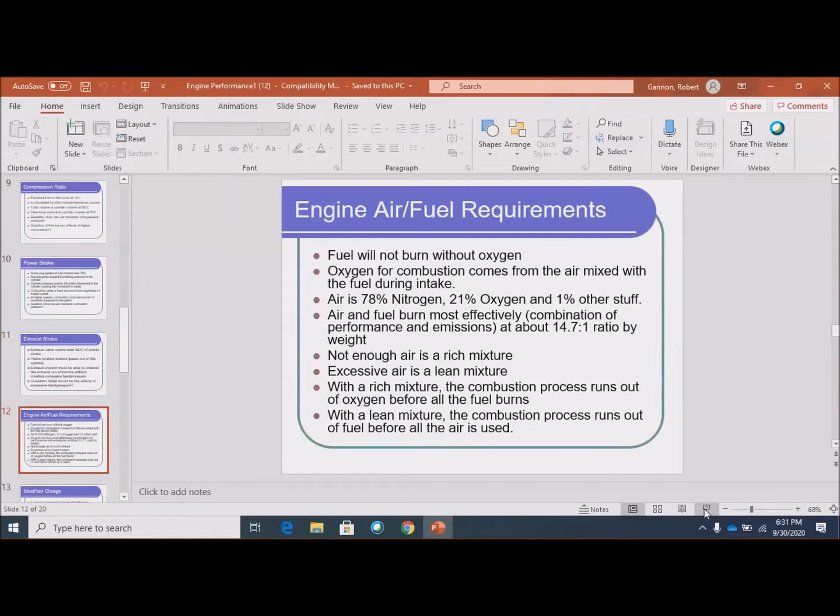And under Module 1 slides, if we open that up, and you can do this yourself or just follow along with me here. We'd gone through all 4 strokes, and we were about ready to start talking about engine air fuel requirements. So that's where we're going to pick it up now. And let me get this full screen here for you. And we'll start talking about it. So I have a bunch of bullet points here. Let me talk about each one of them.

So in the internal combustion engine, which is the gasoline engines we're talking about, or diesel, what happens is there's an air-fuel mixture put into the cylinder and then ignited. And another word for burning is oxidation. In other words, it takes the fuel and combines it with oxygen. And in doing so, a lot of heat energy is released. So we need both fuel and oxygen in order for the combustion process to happen.

Anybody that's ever covered a candle or anything like that knows that the flame goes out pretty quickly once you take away the oxygen. And if you take away the fuel, obviously, same thing happens. So you need both. Where does the oxygen come from? Comes from air that's mixed with the fuel during the intake stroke. So let's talk about that a minute.

For the first probably 80, 85 years that cars have been around, a carburetor was used. And a carburetor was a simple mechanical device that as air flowed through it, flowed through a restriction that created a little bit of a low pressure area, and then that caused fuel to be drawn in, and what controlled the quantity were little jets, little metered orifices that the fuel would flow through.

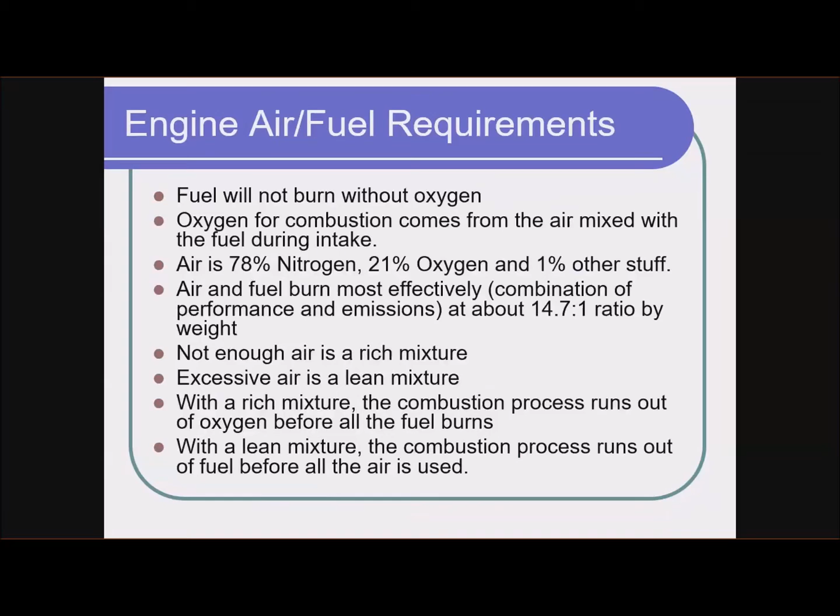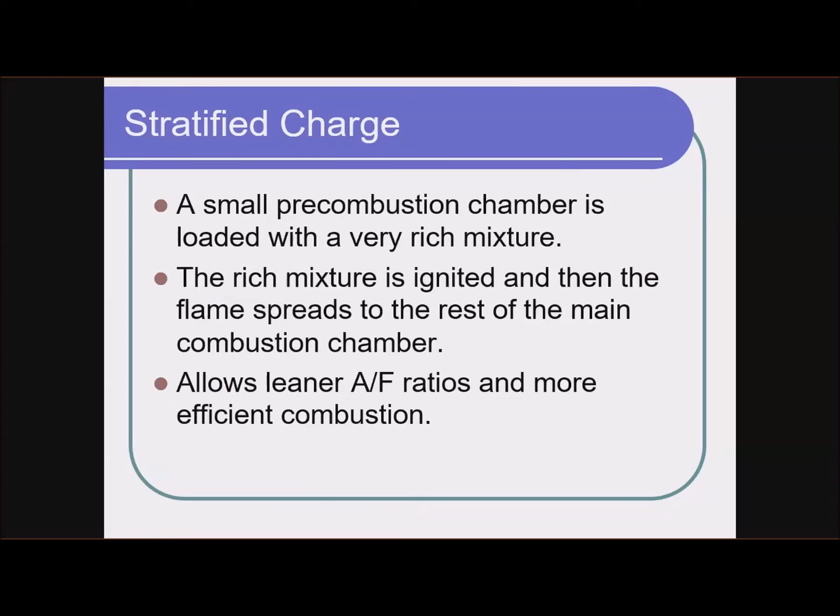This stratified charge, I think Honda had their CVCC, and there's been other engines that inject the fuel into a small area, almost like a pre-combustion chamber that gets lit, and then it spreads out into the main combustion chamber. It's a little bit weird, it allows for leaner air-fuel ratios, but still not as good as direct injection.

I gotta remember how to erase everything here. Yeah, whatever. Just like that.

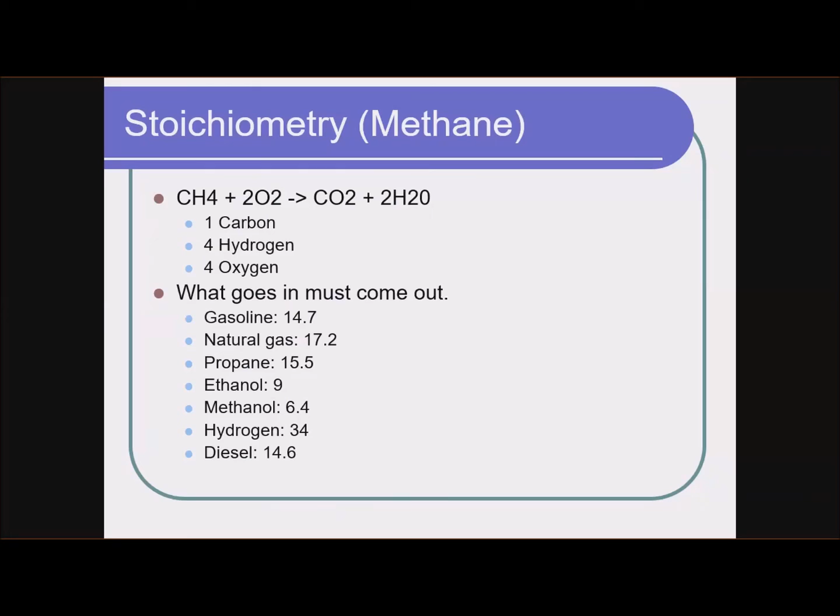So, remember I said, I don't know, a long time ago, probably a half hour ago, I lose track of time when I'm doing these, that the air-fuel requirements for an engine change depending on the operating conditions of the engine. So engines operate under different conditions: startup, idle, acceleration, wide open throttle, cruise, deceleration. And they do these things both warm and cold.

So for startup on a cold engine, it needs to be extremely rich. Now, why is this? This goes back to what I said a few slides back: only fuel vapor burns, liquid fuel does not. And on a cold engine, when you inject fuel in, a lot of it doesn't vaporize. On a warm engine, a lot more of it vaporizes than on a cold engine. So kind of across the board, a cold engine, you need to throw more fuel at it for it to run right. This is why gasoline engines have chokes.

If you deal with a lawnmower or a weed whacker, chainsaw, something like that, a snowblower, there may be a choke on it that you need to use in order for it to run well when you first start it, especially on a cold day, and then as things warm up, you can take that choke off. And what the choke does is it blocks off the airflow and creates a lot of suction that pulls fuel in through the carburetor.

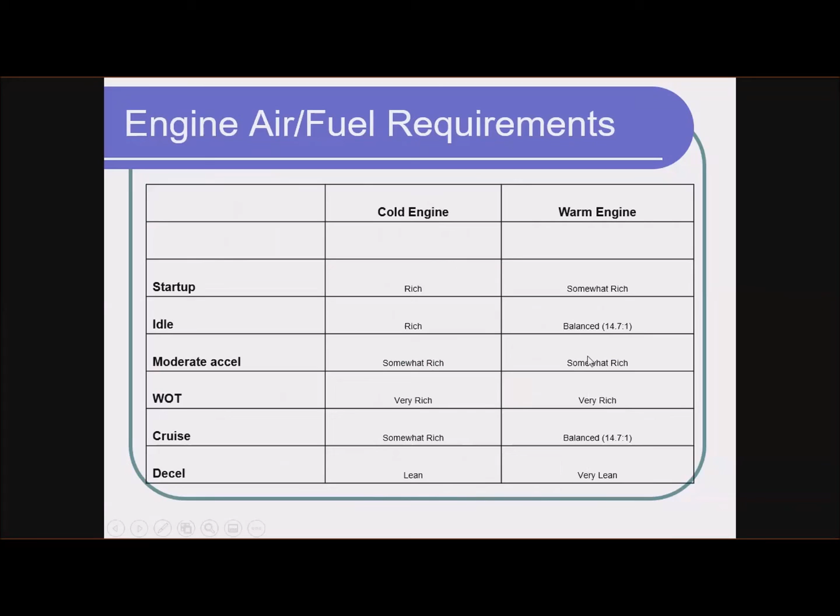So what does that mean? That means that 14.7 to 1 is not the best mixture for fuel economy, right? We get better fuel economy with a leaner mixture. It's not the best air fuel mixture for power. We get more power with a richer mixture. So what is it really? What is that air fuel mixture of 14.7 to 1?

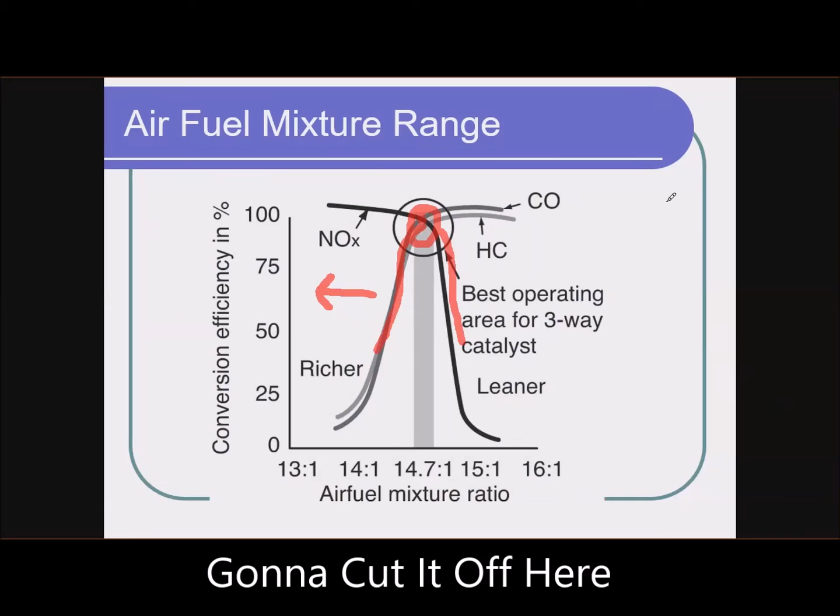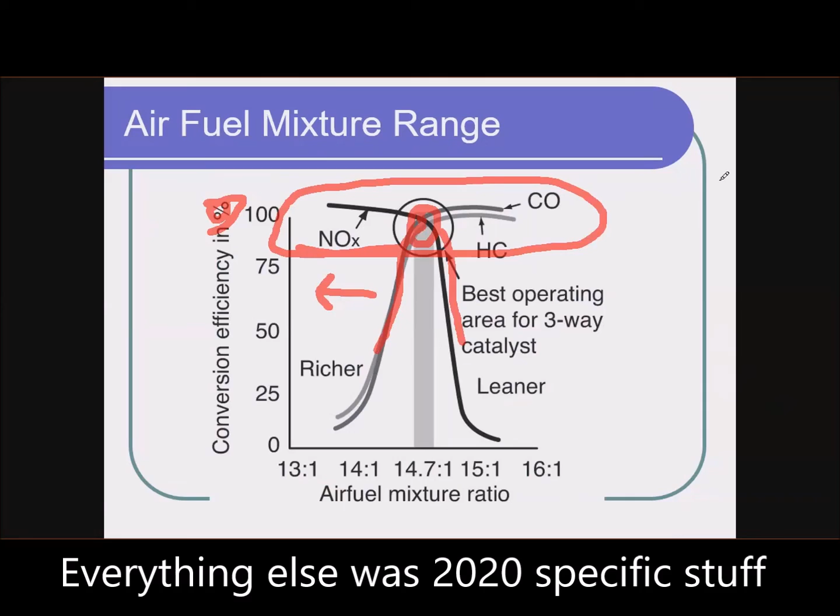It's a compromise, right? Here, if we go any leaner, our conversion efficiency for oxides of nitrogen goes down very quickly. If we go any richer, our conversion efficiency for carbon monoxide and hydrocarbons goes down very rapidly. So in this center spot here, we have acceptable efficiency for all three of these pollutants. So it's a compromise. It's where the catalytic converter works best for all three. This is what's known as a three-way converter. If you see the term TWC, three-way converter, this is what they're talking about. One that deals with all three of these harmful emissions.

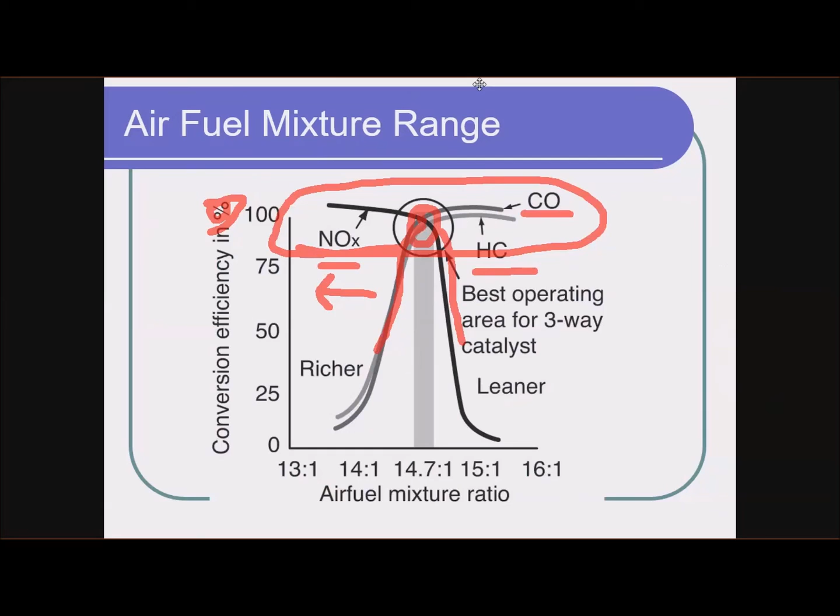All right, let me close that out. We talked about, yeah, I think, you know what? I think we'll leave it right here.